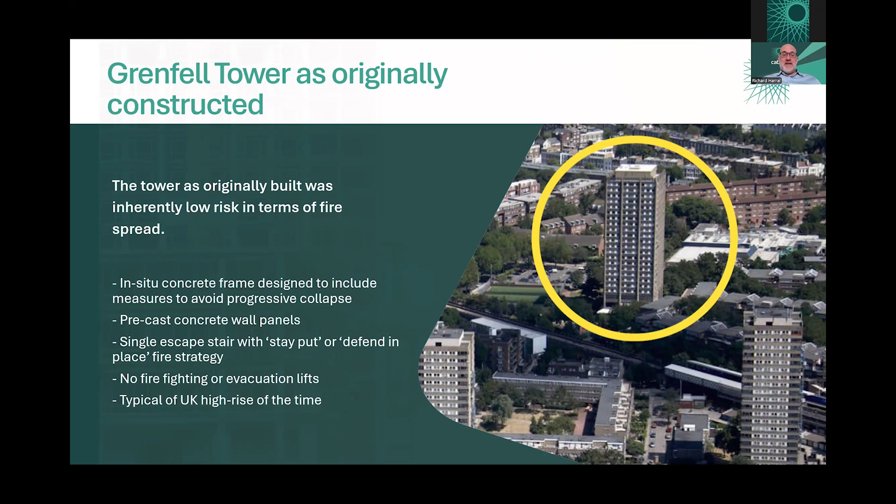Grenfell Tower, as originally constructed, was inherently low risk in terms of fire spread. It had an in situ concrete frame designed to include measures to avoid progressive collapse post Ronan Point, and perhaps that's one of the reasons why it did actually stand up to the events in June 2017 and remained structurally sound. It had precast wall panels, a single escape stair with a stay put or defend in place fire strategy, no firefighting or evacuation lifts, and was in effect typical of UK high-rise of the time of its construction.

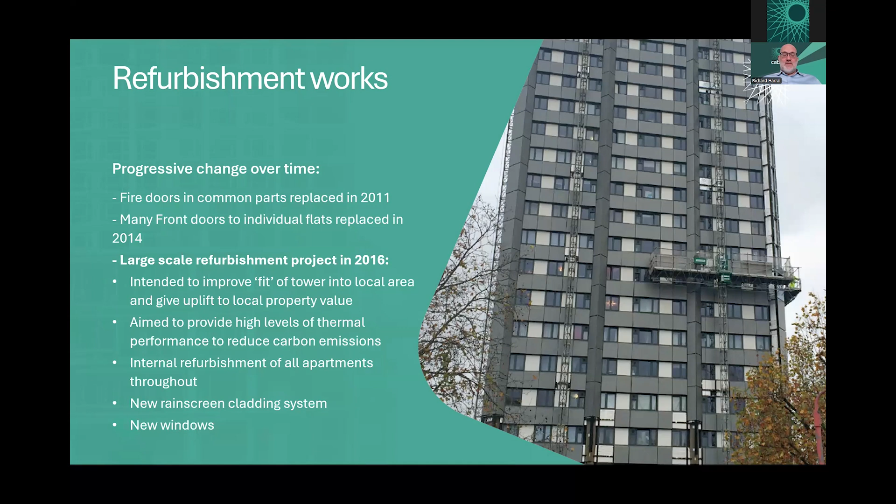Refurbishment works were undertaken over an extended period of time. Most recently, fire doors in common parts were replaced in 2011. Many front doors to individual flats were replaced in 2014, and there was a large-scale refurbishment project in 2016. It was intended to improve the fit of the tower into the local area and give an uplift to local property value, aimed to provide high levels of thermal performance to reduce carbon emissions and residents' heating bills. It consisted of an internal refurbishment of all the apartments throughout, a new rain screen cladding system, and new windows for the entire building.

At the time that the work was undertaken, the system of regulation in England and Wales was one established in 1984, which had moved away from a prescriptive system of regulation to a functional system of regulation to allow greater innovation, followed by progressive governments increasing competition between public sector and private sector building control bodies to improve service delivery. The functional system relied on people making reasonable provision against functional requirements, but functional systems permit a wider range of solutions in return for higher levels of competence amongst those determining how compliance needs to be delivered. It's harder to measure and enforce than prescriptive requirements.

Competition in the building control sector was increased over time between local authority and approved inspectors, which were private sector building control bodies, but also through the progressive extension of competent person schemes who self-certified what was supposed to be common, high frequency, low risk works. Clients had the choice of who provided their services. And since the early and mid 90s onwards, there was a move towards better regulation and then deregulation, with the system progressively relaxed, clients increasingly exercising disproportionate influence over not only which building control body they chose, but the decisions of that body, and potentially, or arguably at least, an increased conflict of interest in service provision.

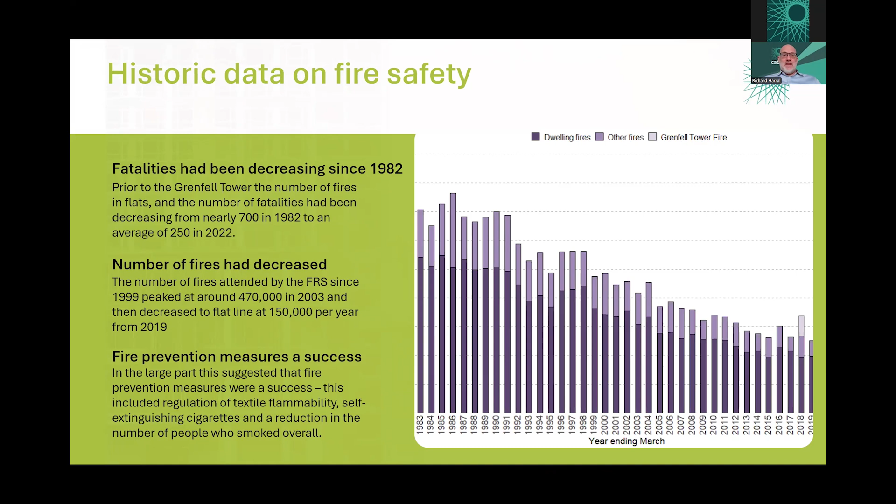Up to 2017, fire statistics suggested that holistically, the measures that have been taken in building regulations, in occupational management, in terms of regulations for the fire resistance of fabrics and textiles, furnishings, moves to make cigarettes more self-extinguishing, etc., had been highly effective. So the statistics suggested that both in terms of fires and in terms of injury and fatality, there was a progressive reduction. And of course, these statistics were ultimately misleading as to the risks that were actually developing.

So on the night of the fire, the fire broke out in a kitchen on the fourth floor just before 1 a.m. The tower had a stay put fire policy, so the fire brigade came to address the specific fire without looking at simultaneous evacuation. However, within minutes, the fire had penetrated the window and spread into the external cladding. From the fourth floor, the fire spread up and across the eastern side of the building.

It reached the top floor by 1:26. It had spread to the north side by 1:42. It had spread from the east side to the south side of the tower by 1:52. And by 10 past 2, just an hour and 10 minutes after the fire started, multiple fires were burning inside the building, and residents were making their way to upper floors to escape the smoke and heat.

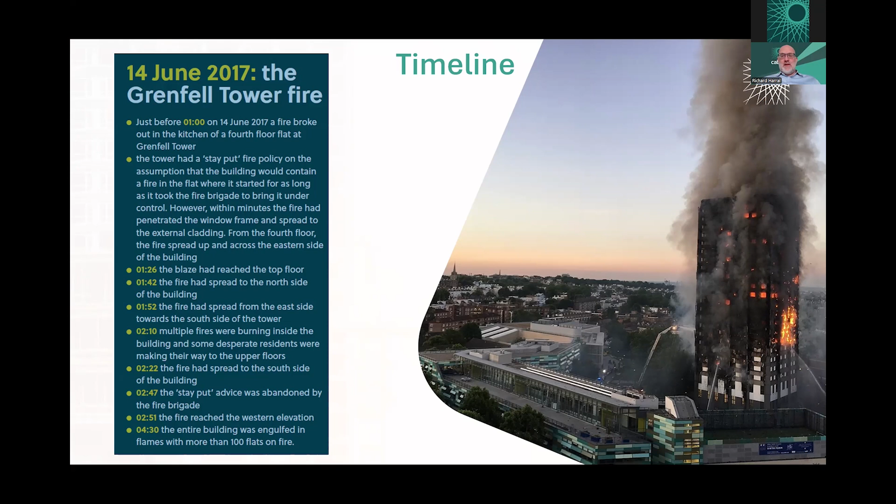By 2:22, the fire had spread to the south side of the building. By 2:47, stay put advice was abandoned by the fire brigade. By 2:51, the fire had reached the western elevation, and by 4:30, the entire building was engulfed in flames. So, an incredibly rapid development and spread of flame.

The Phase 1 Grenfell Public Inquiry report dealt with events on the night primarily and highlighted a number of firefighting issues which are worthy of noting for the record. There was a lack of adequate water pressure requiring Thames Water to intervene. There was slow deployment of high ladder facilities. There was a lack of extended duration breathing apparatus, which hampered firefighters.

Radio systems were overwhelmed due to the system traffic. There was too much traffic on the radio system. The concrete structure further impeded radio signals, further hampering understanding of the fire's progress. More recent building developments around Grenfell Tower impeded fire service access. Smoke in lobbies and staircase was impenetrable from as early as 18 minutes after the fire started.

There was a late realization the fire was out of control and a delay in moving to simultaneous evacuation, and there were no sprinkler systems to help suppress the fire spread or to assist firefighters in getting control. So the question that is most material is how did those circumstances which permitted the fire to spread so catastrophically come to pass?

One of the most important lessons and an area of intense scrutiny is the compartmentation failure of the building during this process. Stay put or defend in place strategies are entirely reliant, I think it's fair to say, on compartmentation being effective. Compartmentation should include walls and floors between apartments, around all windows and penetrations, and within the cladding system at each floor. There were significant failures around openings, particularly around windows and penetrations.

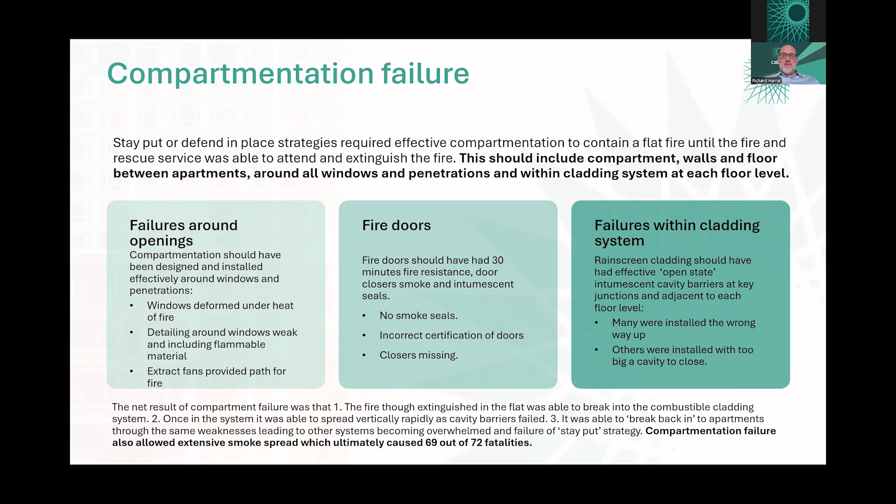Although the fire in the flat was able to break into the combustible cladding, it was the comprehensive failure in compartmentation that allowed other systems to become overwhelmed and caused the failure of the stay put strategy. The inquiry found that the fire is most likely to have entered the cladding as a result of hot smoke impinging on the window jamb,

and also looked very closely at the ACM or aluminium composite material cladding, which was deemed to be the primary mode of fire spread in the cladding system. ACM consists of two thin layers of coloured aluminium sandwiching a filler core. There were three categories: mineral core, Cat 1, which had a fire classification of A2 or A1, depending on the manufacturer. Fire resistant or FR, known now as Cat 2, which had a mixture of polyethylene but also mineral fillers that significantly reduced combustibility to create an interim standard of fire performance.

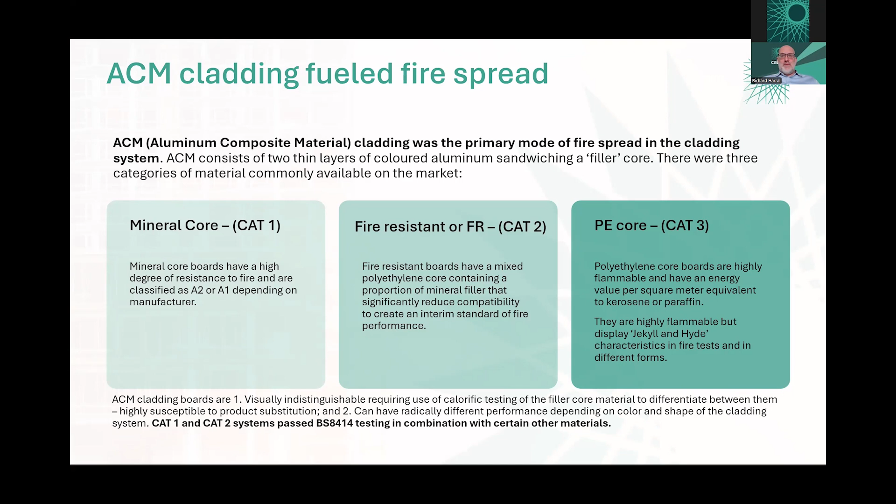And polyethylene core, Cat 3, which were pure polyethylene core boards, which had a high flammability, an energy equivalent per square meter to kerosene or paraffin, and displayed what has been described in some places as Jekyll and Hyde characteristics in fire tests. ACM boards are visually indistinguishable from each other, and often calorific testing has to be used to determine which type of board is available, but they can have radically different levels of performance, including depending on the color and shape of the cladding system.

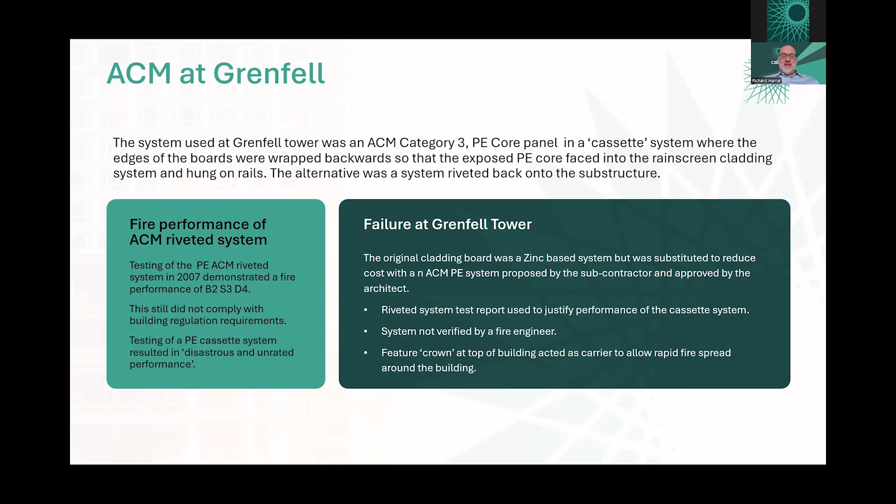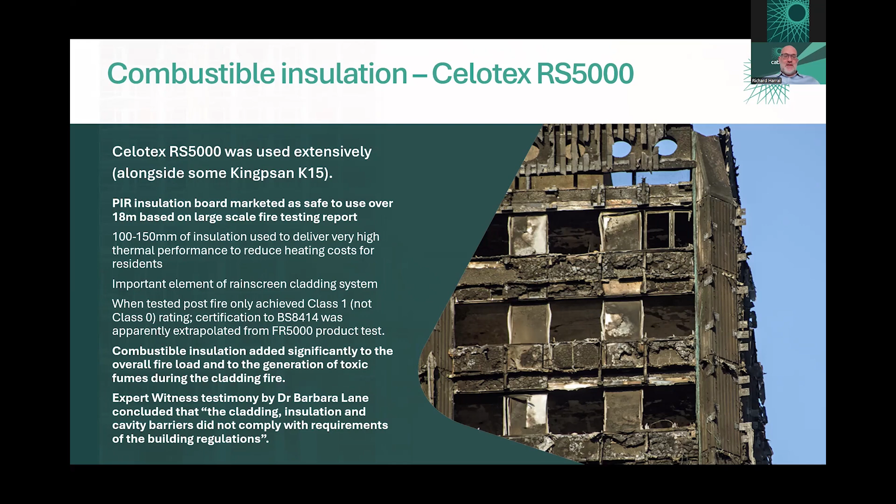Combustible insulation was also used on the building. This was marketed as safe to use over 18 meters based on large-scale fire testing reports. 100 to 150 millimeters of the insulation was used to deliver high thermal performance, which added significantly to the fire load or energy load in the cladding system. When tested post-fire, it only achieved a Class 1, not Class 0 rating. And certification to BS 8414 was apparently extrapolated from FR 5000 product tests for the RS 5000 product. So as I said, this added significantly to fire load. An expert witness testimony by Dr. Barbara Lane concluded that the cladding, insulation and cavity barriers did not comply with requirements of the building regulations.

Fire doors and smaller elements of the building's compartmentation played an important role. Once the fire had spread in the cladding system, the failure of fire doors resulted in escape routes on all floors, including the single stair, becoming flooded with smoke. 106 out of 120 individual doors were replaced with new fire doors. When tested post-fire, these new doors failed to meet minimum 30-minute fire tests, and it became clear that the doors as installed did not match the specification that had been issued based on the test data, so they were not the same doors in effect.

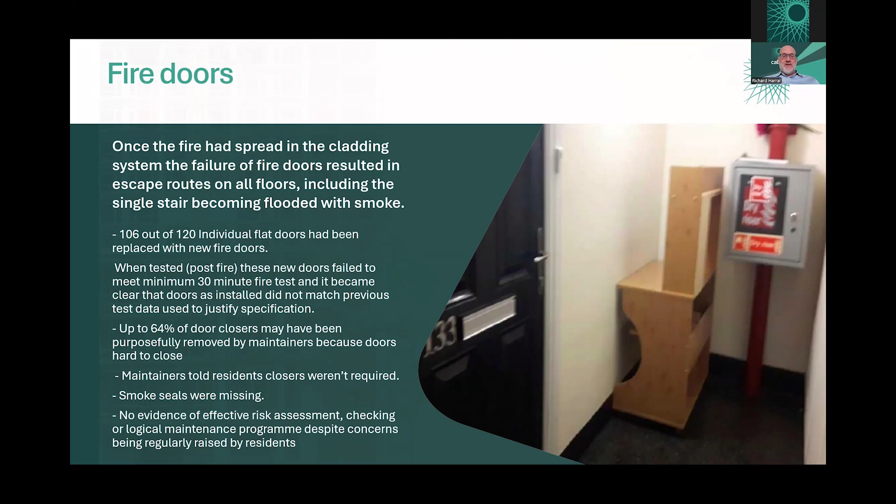Up to 64% of door closers may have been purposely removed by maintainers because the doors were hard to close. Maintainers told residents closers weren't required, smoke seals were missing as well, and there was no evidence of effective risk assessment or logical maintenance program, despite concerns being regularly raised by residents.

Once the compartmentation started to fail, it triggered activation of the smoke ventilation system, but this was only designed to deal with a fire in a single story of the building. It was a unique system never specified on another building by designers, which needed to retrofit into the existing building voids. So it was designed to meet the constraints of the building. Once fire had spread to other floors, the system was overwhelmed almost immediately. It was only ever designed to cope with smoke and fire on a single story. Automatic vents did not close properly on other floors, so the system did not perform as designed.

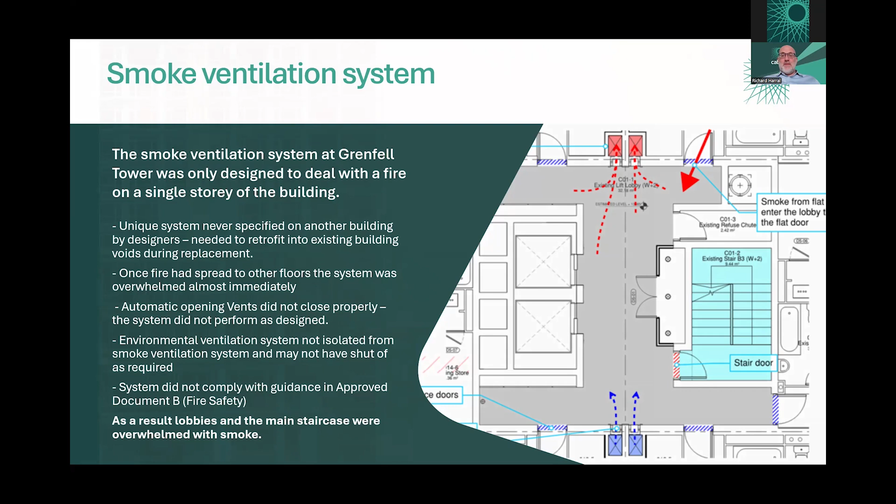The inquiry suggests that environmental ventilation systems were not isolated from the smoke ventilation system and may have not shut off as required, and also that the system did not comply with the guidance in Approved Document B, fire safety. As a result, lobbies and the main staircases were rapidly overwhelmed with smoke.

In addition, the gas main within the building seems to have been contributing throughout the period of the fire to both the intensity and duration of the fire. The gas main had been upgraded, but was a cause of two distinct issues. The gas pipes breached compartmentation in compartment walls and from lobby to lobby, and were not fully boxed in at the time of the fire, even though the building was occupied. Valves that should have enabled isolation of the gas main could not be found and may have been built over during refurbishment. Reports suggest that the fire was only extinguished once the gas main was externally shut down, which again suggests the gas had continued to fuel the fire long after other combustible sources were exhausted.

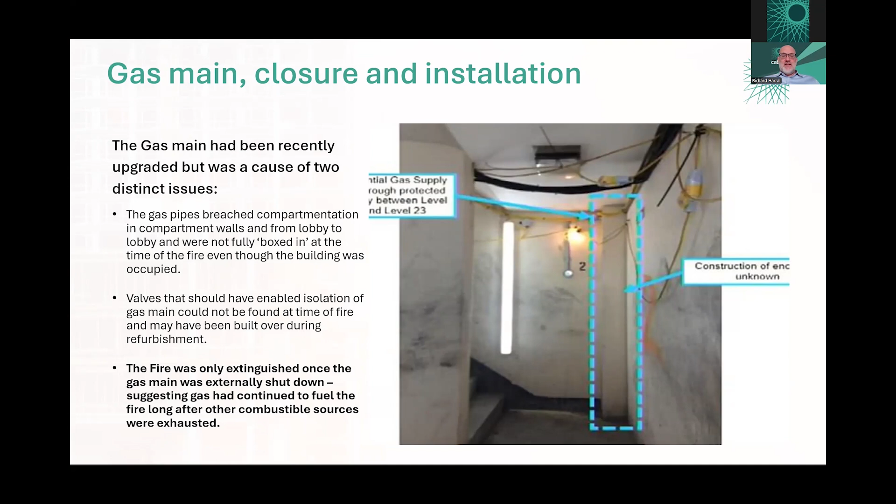Finally, in terms of the dry and wet risers within the building, the wrong risers had been installed. Building regulations require wet risers installed in buildings over 50 meters. Those installed at Grenfell Tower were dry risers, relying on fire appliance pressure to supply water to the top of the building. It should have had a wet riser supplied from a pressurized tank within the building, and that should have been serviced and available at all times.

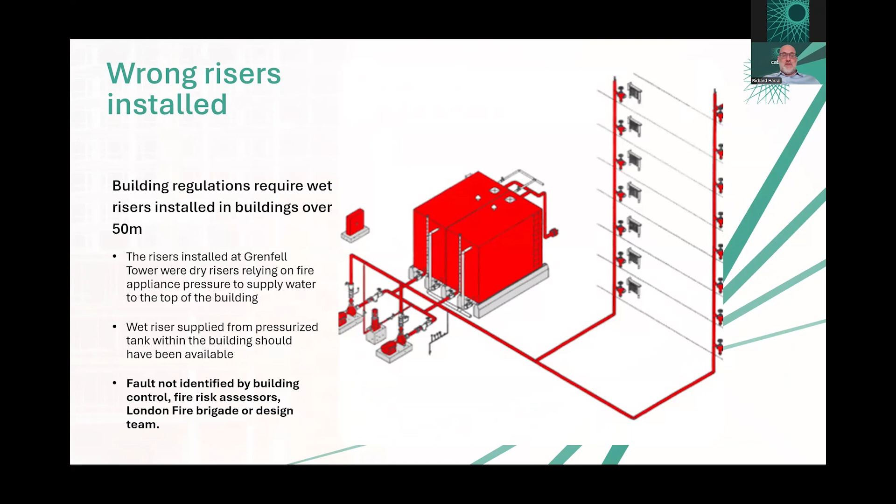And this failure in specification and provision was not identified by building control, fire risk assessors, London Fire Brigade, or any of the design team. So a very significant and comprehensive set of failures that ran across pretty much all of the critical systems designed to protect life safety in the building. There were also failures in building management, procurement, and refurbishment.

So the inquiry noted a number of specific management failures, targeting the Royal Borough of Kensington and Chelsea Tenant Management Organisation's responsibilities in particular. There were no plans in place to evacuate disabled people in the event of a whole building fire. The fire risk assessor, the inquiry suggests, was not truthful about their qualifications and competence to undertake the fire risk assessment, and their ability was widely seen as inadequate.

There were 280 fire safety actions which had been identified in risk assessments which had not been addressed at the time of the fire. The London Fire Brigade issued a series of fire door deficiency notices. The issues with fire doors were well understood, but delayed or refused, seemingly on cost grounds. So the defects in the fire doors were not addressed.

Complaints from residents from 2010 onwards were not addressed, including in relation to fire doors, cladding specification, smoke ventilation. And there were previously identified issues with the smoke ventilation system, which went unaddressed for 6 years despite LFB enforcement notices.

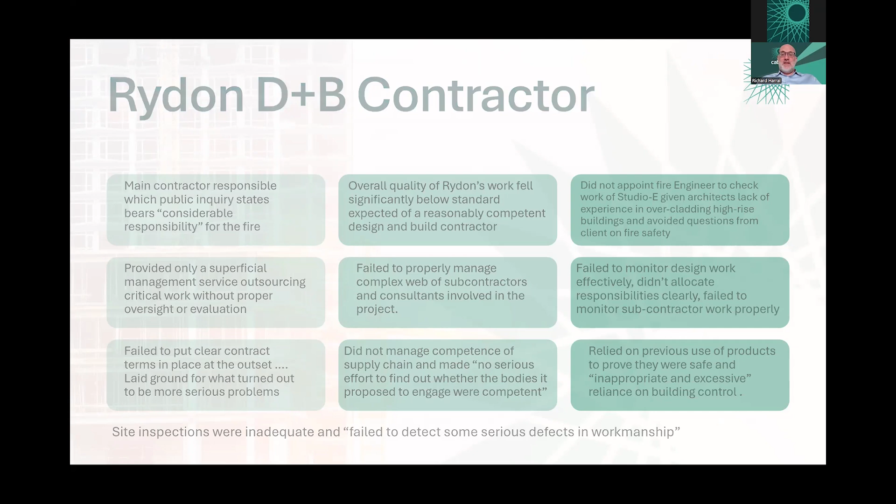The architects at Studio E were identified by the inquiry as bearing very significant responsibility for the fire. We've spoken about difficulties with the way that they were appointed. There are fundamental misunderstandings about the nature of the project, its obligations and responsibilities. They assumed subcontractors were solely responsible for the compliance of their work and that the work met the required standards.

They had an overriding obligation to the client, TMO, and Rydon to ensure work was carried out properly and materials were suitable. They admitted they had not read the relevant sections of building regulations covering fire safety for tall buildings. Again, they over-relied on previous use of insulation and cladding products as being safe because they had already been used elsewhere, rather than understanding whether, in their own views, those specifications were appropriate. And the project architect was not fully qualified and hadn't undertaken their professional exams, so lacked experience.

The public inquiry found that Studio E and Rydon and cladding contractor Harley Facades all took a casual approach to contractual relations. They failed to identify their own responsibilities for important aspects of the design, and in each case they assumed that someone else was responsible for matters affecting fire safety.

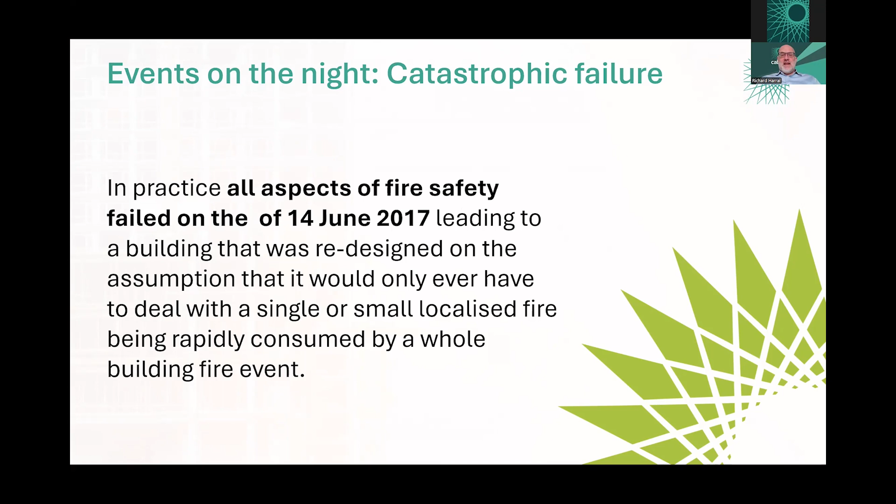And it is clear when you look at all of these events in the round that extensive change is needed within the industry, and we should all think very carefully about our own specific roles and how we might be contributing to similar risks in other projects. I'll now hand over to Dr. Hywel Davies to undertake the second part of this presentation.

In particular, the cladding and the insulation products that were used on Grenfell. The products had gone through a number of tests. They had been tested to BS 476 Part 7, but both the nature of those tests and what those tests really indicated was not well understood. Richard has already commented on the failings of a number of those involved in the project to read building regulations, to read the approved documents, the statutory guidance that supports them.

And there were two failures. One failure was to ask appropriate questions, and the other was to understand the meaning of some of the test results. So products were supposedly tested to Class 0 and to BS 8414, but those involved in the design and the construction, I think it's fair to say, did not understand what those test results meant. And there were various desktop studies involved that were not properly scrutinised.

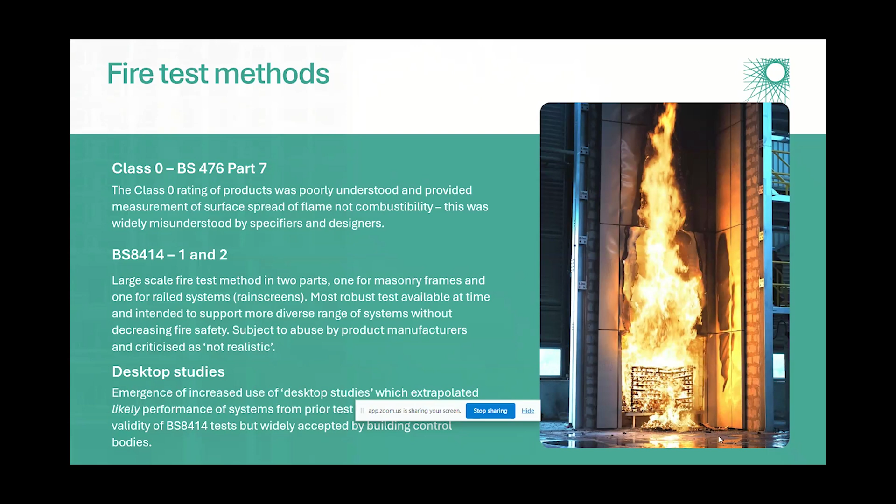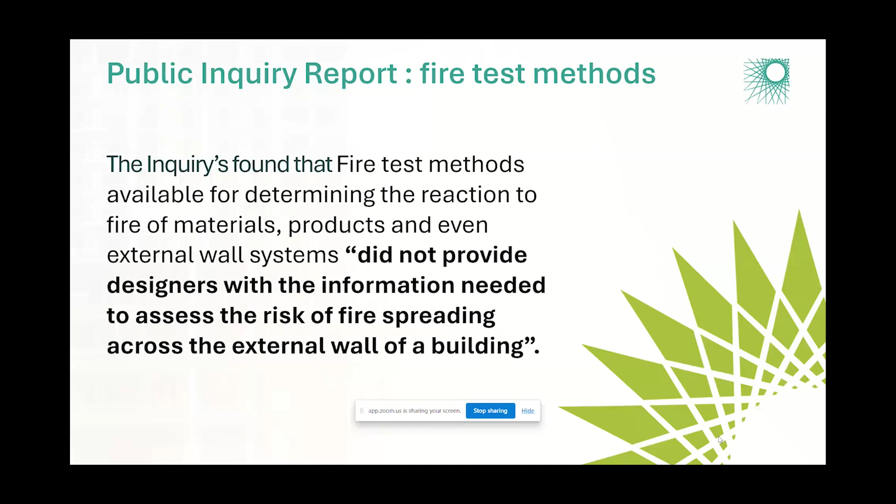But the inquiry found that worse than all of those project-specific failings, the fire test methods available did not provide designers with the information needed to assess the risk of fire spreading across the external wall of a building. And it's fair to say that some of the testing that was carried out to support phase 2 of the inquiry indicated the extent to which it was not possible to rely on some of those test results in design activity.

There was also a real problem with the way that the product manufacturers were behaving. And that was particularly evident in different ways for each of the three manufacturers. Kingspan were found by the inquiry to have knowingly created a false market in insulation for use on buildings over 18 metres by claiming that its product was successfully used elsewhere.

But more than that, they had used a certificate from 2005, which was a decade before the refurbishment, based on a successful BS 8414 test, but based on a successful test using the composition of the insulation product as it was in 2005. And they did not have a successful test on the composition as it was changed in 2006. Indeed, it failed BS 8414 tests, but the successful BS 8414 test was used as a basis for

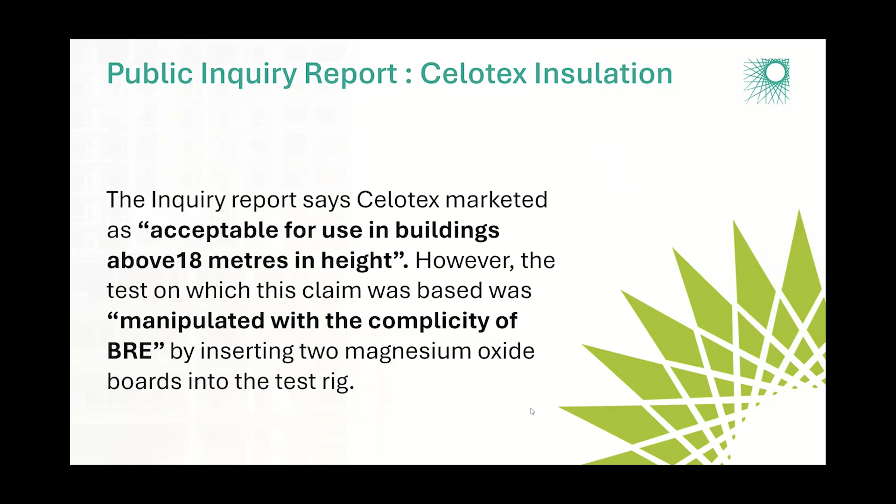BRE is criticised, and you will have the slides later, so I won't go through this in detail, but poor supervision of the testing, and they're also criticised for a failure to make government aware of things that they knew when they were certainly at the time of the fire widely regarded as a leading expert body on fire safety. And they are criticised in the report quite firmly for their failings over a period, I'm afraid to say, of decades.

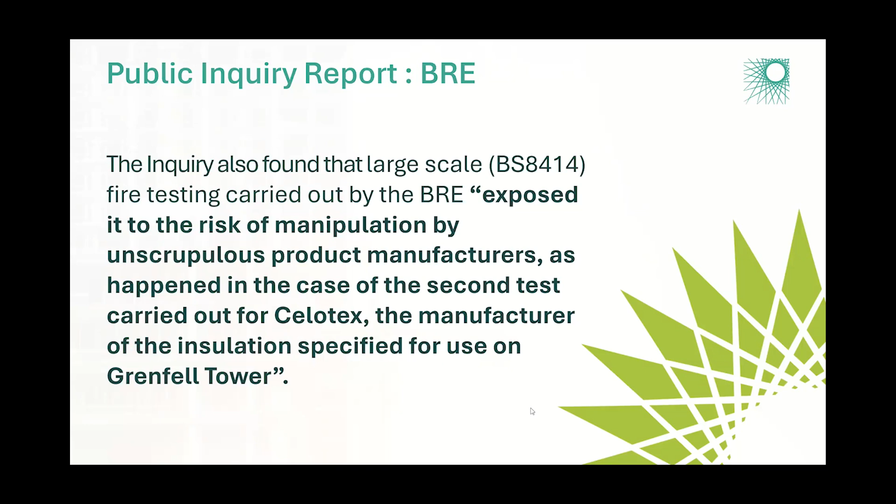Marred by unprofessional conduct, inadequate practices, a lack of effective oversight, poor reporting, and a lack of scientific rigour. And there was a concern that the BRE was open to manipulation by unscrupulous product manufacturers. There was also a compromise in that whilst BRE staff were undertaking tests, they were also giving advice. And the inquiry is very critical of this.

And it's an issue that has also been picked up by Paul Morrell and Anneliese Day in their independent review of testing and certification. Test bodies should test, and they should not be giving advice on how to pass the test. The BBA is criticised as well for lack of robust processes at the time, failure to enforce the terms of its contract, and ultimately for issuing a materially incorrect certificate.

LABC ran a private, non-UKAS approved certification scheme for construction products, and they are criticised for inadequate expertise. They engaged a senior building control officer in a local authority who, it has to be said, did express concerns about his own level of knowledge and capability to undertake the role, and was assured that he would receive support from LABC. The relevant chapter of the report indicates that he did not receive the promised support, and that the LABC process resulted in a certificate that was based on inaccurate, inappropriate information and should not have been issued.

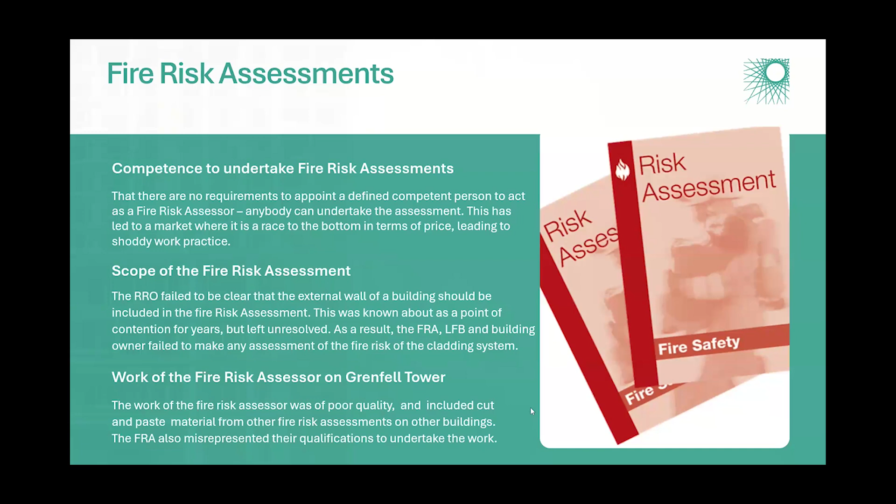There were failures around fire risk assessments, which I think Richard has already spoken to, and the work of the fire risk assessor was inadequate, and indeed the inquiry finds that he had misrepresented his qualifications to undertake the work. It seems that that may be investigated further. The government was found to have consistently resisted calls from across the sector to regulate fire risk assessors. That has now come through in the inquiry recommendation to that effect.

And central government was guilty of failings that frankly go back 40 years. Various fatal cladding fires, Garnock Court, Lakanal House, should have been seen as red flags, but weren't. In the case of Lakanal House, in spite of a coroner raising concerns with government. And the inquiry concludes that the fire was the culmination of decades of failure by central government and other bodies in positions of responsibility in the construction industry to look carefully into the danger of incorporating combustible materials into the external walls of high-rise residential buildings and to act on the information available to them.

And the inquiry also stated quite clearly that Approved Document B was unclear, not properly understood by a significant proportion of those working in the construction industry. And if I can add an observation, I think we also have an issue that many in the industry do not understand the difference between the requirements in Schedule 1 of the building regulations, Part B, the functional requirements to make appropriate provision for means of escape, for example, in B1, and the statutory guidance that is contained in the approved documents. And I suspect there is work to be done there.

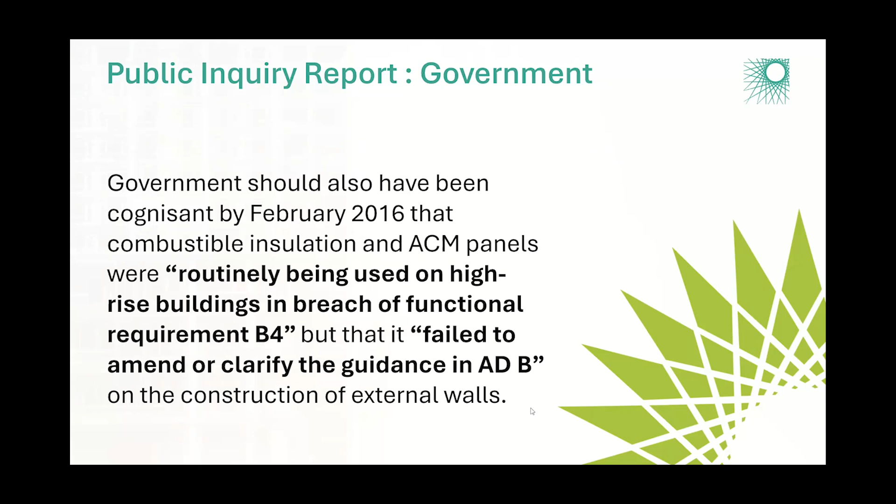Government should have been aware by 2016 that combustible insulation and ACM panels were routinely being used on high-rise buildings in a way that they shouldn't have been. They did not comply with functional requirement B4, and the inquiry criticises government for failure to amend the guidance in Approved Document B.

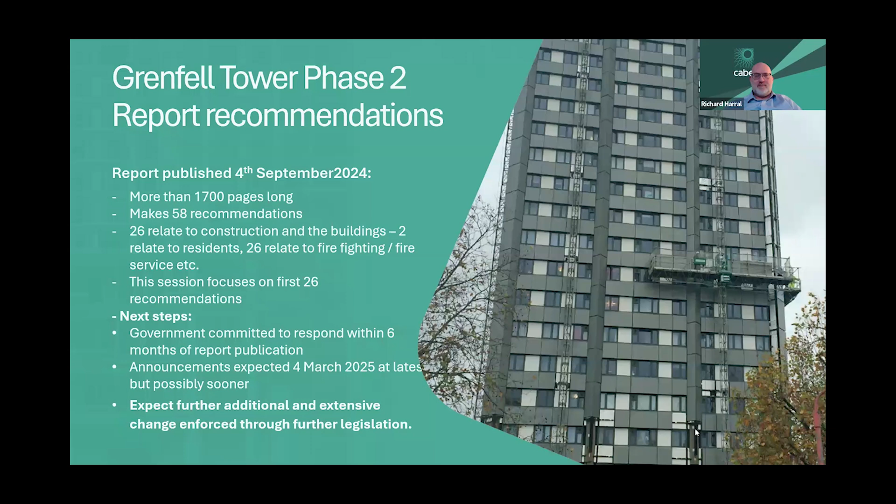So, what have we learned? What should we understand? Firstly, prioritization of economic growth over compliance by successive governments led to a weak system without sufficient resource or enforcement, both at a central government level and at a local government level. I think that's extremely relevant given where we are in the economic cycle.

There are justifiable arguments for not including building regulations in consideration of wider deregulation in the future, which must be given heed to. Competition weakened the position of building control bodies as regulators, and that worked in both directions within the public and private sector. Guidance issued by government was unclear and misunderstood.

A process, you might argue, of progressive salami slicing, of progressive gaming or marginalisation of requirements. But however we got to the position we did in 2017, the industry did not understand its expectations and responsibilities, even though they were implicit in law. There's a failure by government to respond to warning signs, and that must change. And the standards and systems were purposely subverted.

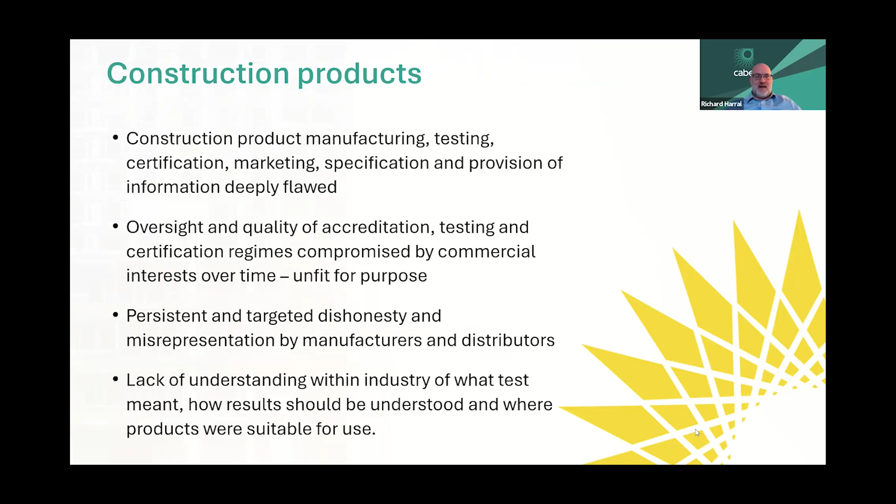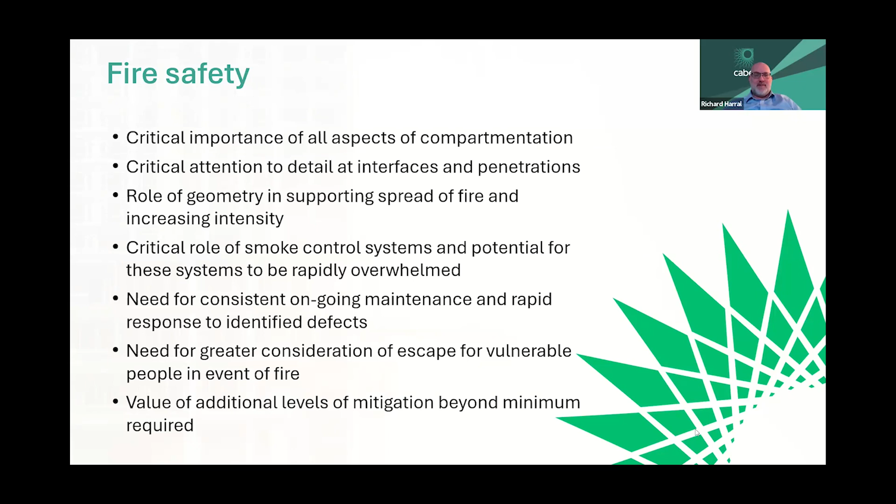Now, just one thing to note, before I hand over to Hal to go through the inquiry recommendations, CABE, in collaboration with the Engineering Council, has worked to develop a competence assessment scheme for its members and for others wishing to demonstrate their competence to work on higher risk buildings. We have our higher risk building registration scheme, which is open to people at a technician, incorporated engineer, and chartered engineer level. It's a robust attestation of people's experience and competence to work on higher risk buildings.

And I would encourage everyone to think about that as a way of being able to demonstrate their legal compliance, but also as a way of identifying the skills and knowledge that they need to work within their limits of competence. And I'm now going to hand over to Hal. Next slide, please, to take us through the specific recommendations of the report.

Thank you very much, Richard. Before I get into the detail, I do just want to make one quick comment, partly in response to something I've seen on Slido. I don't want to preempt the questions, but I think it's very important to say that what we're dealing with here are the recommendations of a formal public inquiry held under the Inquiries Act 2005, and a public inquiry is established in order to find out what happened, and the inquiry has made a number of observations on the contribution of various parties, and we've gone through them.

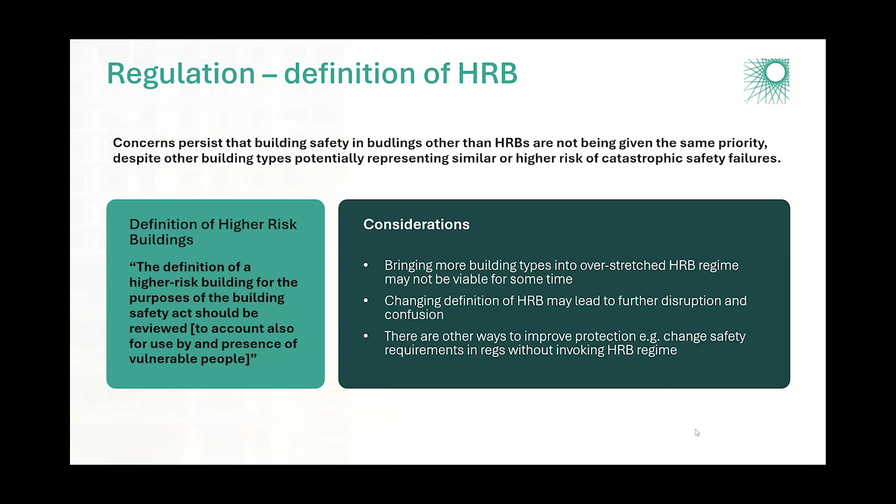And again, government will need to think very carefully about that, and they may need to balance whether there is sufficient existing legislation that needs to be applied and enforced more significantly, or whether there needs to be a change. Again, we will have to wait and see. Could I have the next slide, please?

There is a recommendation that all responsibility for fire and building safety and product testing should be brought together in one department. That has been done before. We've had multiple departments, we've had single departments. Government will have to take a view on what it wants to do on that. And there may be benefits to a single body, a single department.

It's also worth bearing in mind that government interacts with construction in 3 distinct ways. First, as the safety regulator, and indeed as the construction products regulator, but it also interacts as the sponsor of the industry, as government has an interest in construction performing and contributing to the economy. It accounts for 8 to 10% of GDP, and if some government ambitions for growth are going to be achieved, home building, then it's going to need to work with the construction sector for that. And then thirdly, government is the single biggest client of construction.

So those are 3 distinct things, and whether they should all be brought together in one department or continue to operate separately are all things that ministers will, I'm sure, be being thoughtful about and seeking the advice of civil servants as we speak. And again, we shall have to wait and see. Next slide, please.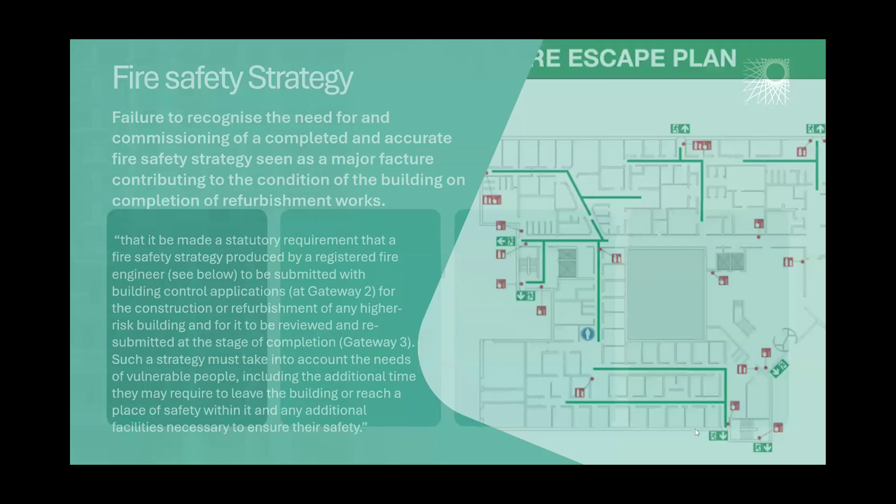Fire performance tests. Now, I touched on this earlier in talking about construction products. The inquiry is recommending that professionals and the academic community are brought in to develop new test methods. And I don't think I'm speaking out of turn if I say that I'm aware that the British Standards Institution is already thinking about this and thinking about how it addresses test method development going forward and how it reviews BS 8414 and the use of BS 9414 for desktop studies. That is being thought about, but government may wish to say more on that in its response.

And I touched on the issue of test results, and the recommendation of the inquiry is very clear that all test results supporting a certificate issued by the construction regulator should be included in the certificate for that product, and that manufacturers should be required to provide the regulator with the full testing history of the product. Now, I think it's important to ask, when does research and development become specific product development? And is this really suggesting that manufacturers will have to open the books on all of their R&D?

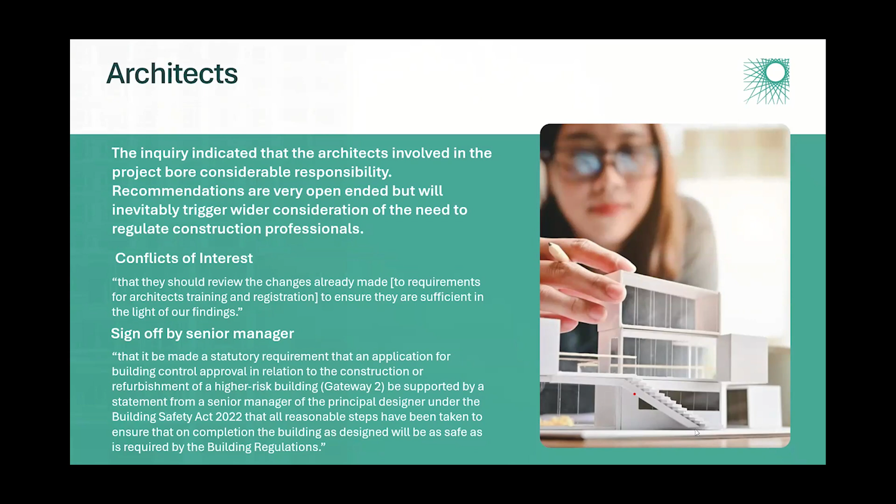There is a proposal for licensing of contractors working on higher risk buildings. And I think we can see why if we listened to what Richard had to say earlier about those involved in the delivery of that project. Richard made a comment about the failings of design and build.

I have heard people from the Building Safety Regulator, when asked, well, does this mean we can't use design and build? And they say, not entirely flippantly, no, there's no problem with design and build. You design it, you get the design approved, and then you build the approved design. What's the problem? Well, we all know the problem is that's not what design and build means. And the inquiry was very critical of that. So we will have to see what government decides to do about licensing those building HRBs, and indeed what they might do about controls elsewhere in the sector.

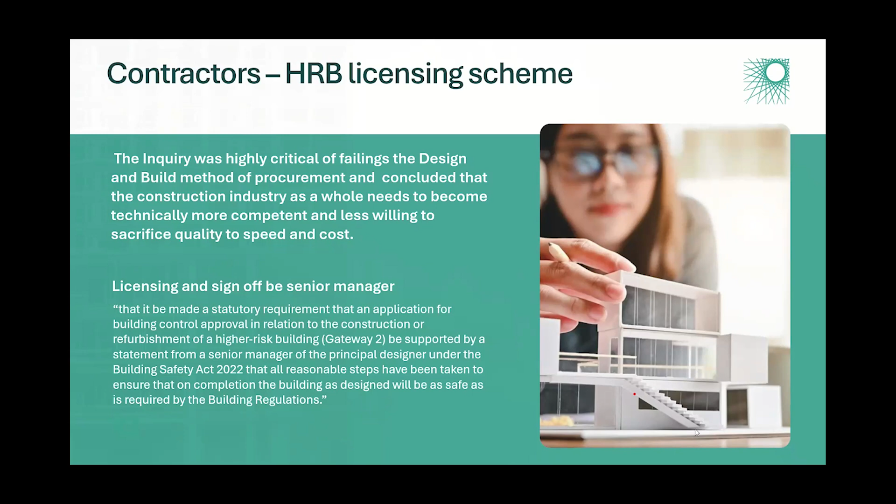Now, we don't know what government is going to do on this, but I think at this point I would like to say that a number of people have made it very clear to government officials that the worst possible thing for the building control sector is a further period of uncertainty, waiting for more change. That's been made very clear to government.

There may need to be further changes to the building control system, but they need to be very carefully thought through, and they need to take account of the fact that we have already seen significant attrition in building control over the last 2 or 3 years, and we quite simply can't afford to push more people out of the profession without exceedingly good reasons. And those points have been made at high levels to government, and we will see what they come up with. But there is certainly an awareness at the Building Safety Regulator that this needs to be handled very carefully.

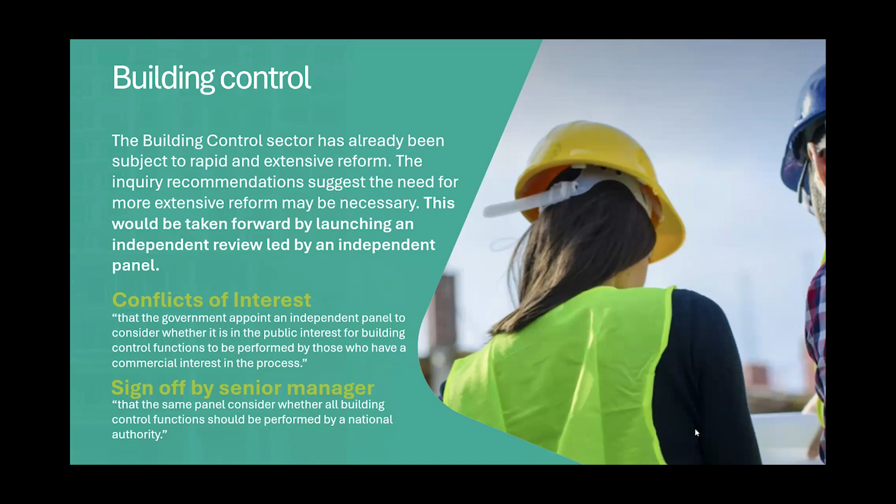The inquiry recommended a construction library, particularly around cladding materials, drawing on the model of the University of Queensland. I think it's fair to say that there has been some thought about how that would apply in the UK. Should it be limited to cladding materials? Are there other things that should be made available? And are there other aspects?

Again, we will need to see what the government says in its response. And this is the sort of thing where undoubtedly there is likely to be consultation and further discussion, and the association will be taking a close interest and participating in that fully if it goes ahead. Next slide, please. I've already said that. No, sorry, I'm getting ahead of myself.

Another inquiry recommendation was around how government responds to recommendations from inquiries. And one of the frustrations for the inquiry is that lessons learned, particularly at Lakanal House, but at other buildings where problems had emerged over the preceding 2.5 decades, that those lessons hadn't been learned. There was a particular criticism of the response to the Lakanal House coroner's report.